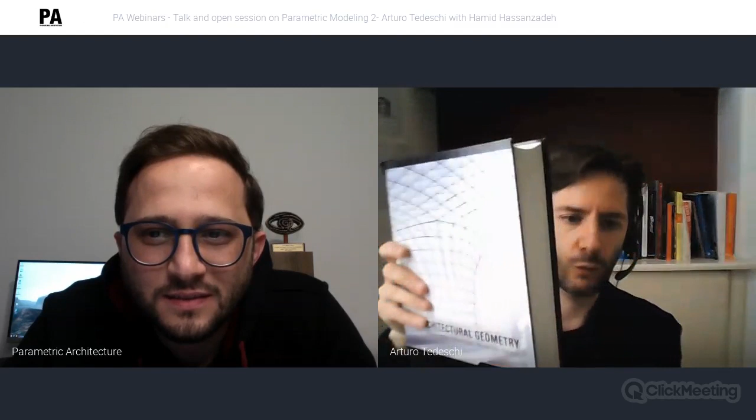This one to me is one of the Bibles, I hope you can see it. It's called Architectural Geometry, by Helmut Pottmann, who is a master, by Bentley Systems. This book was published, I think, around 2006-07, if I remember correctly. It's a great one.

I really love it, and it's more than an overview of architectural geometry. It covers all the topics behind shape, the control of architecture and design complexity. Everything is about shape, everything is about geometry, from NURBS to meshes to surface continuity, all the technical vocabulary well explained in this book, which can be read on two different levels. You can really go deep into the contents, or you can just enjoy the book, not just looking at pictures, but also enjoying it in a more superficial way. To me it's a must-have for computational designers.

There's another one here, called The New Mathematics of Architecture, published by Thames and Hudson. This one is also interesting because there are many examples of architectures combined with mathematical aspects and the DNA behind them.

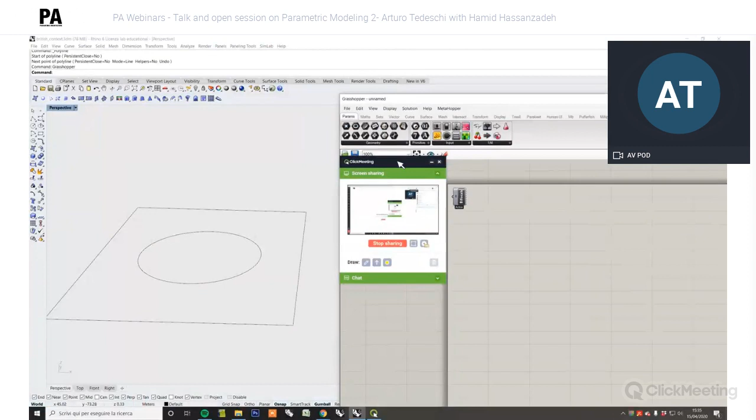Okay, now you should hear my voice again, and you should also see my screen.

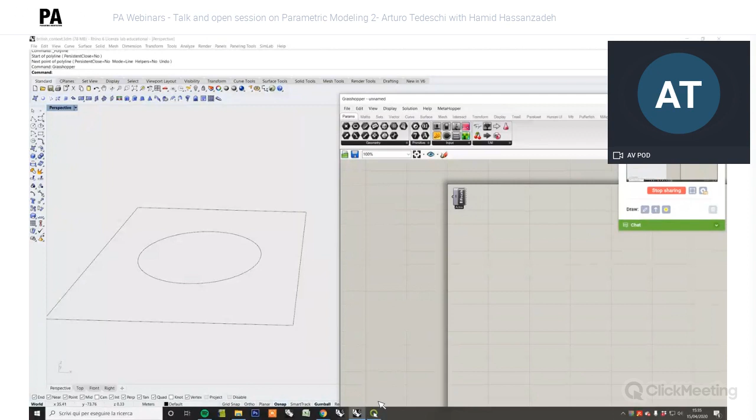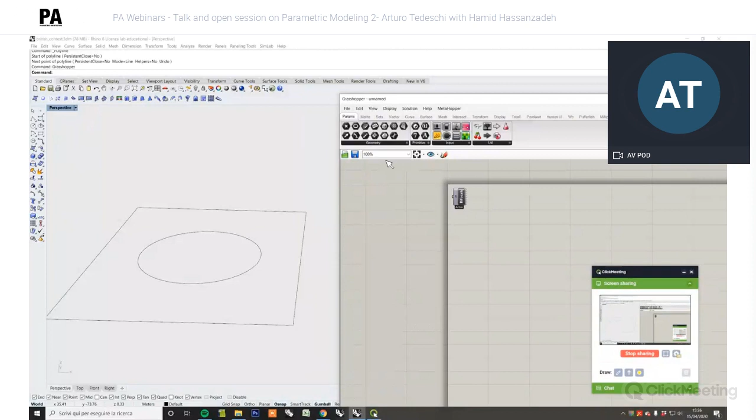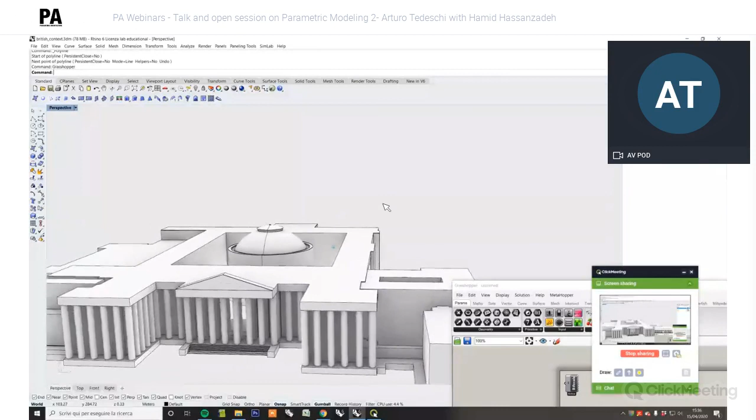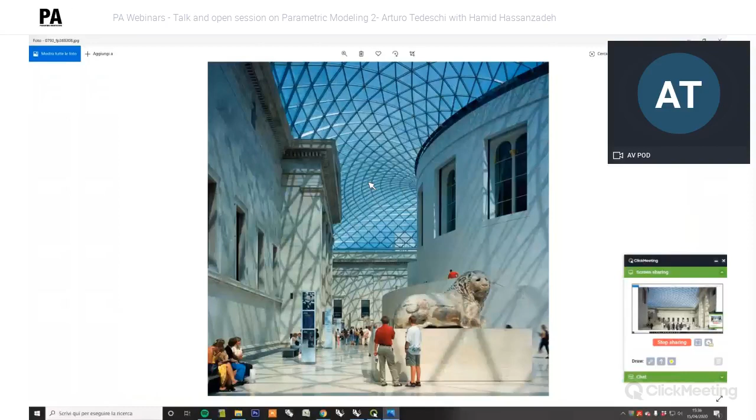Okay, basically we are going to start with a 3D model that I already prepared. Don't worry, you don't have to model the whole building, as you can see here—this is just a way of giving you context. This is the British Museum in London, and we are going to go through the process to create the final geometry. We're going to create the roof like this, which is a kind of steel diagrid based on a square grid with a cylinder inside, as you can see here.

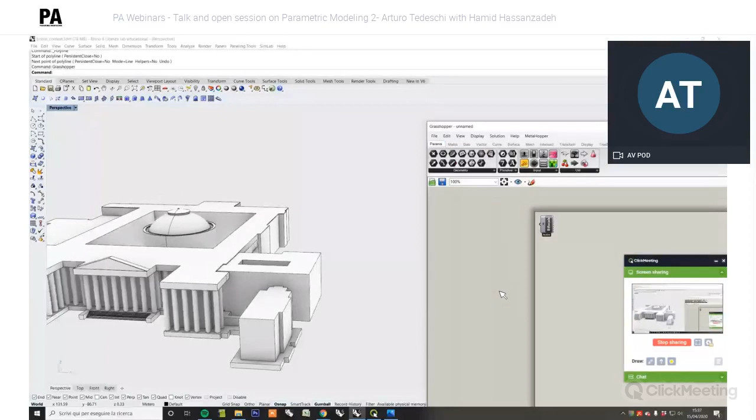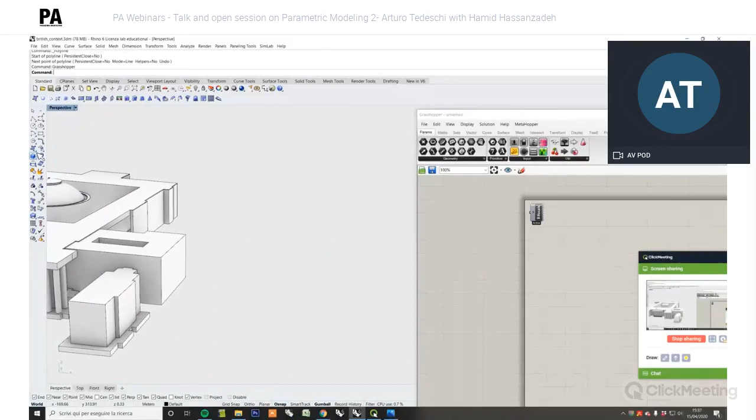Okay, so in general, when you want to create a three-dimensional grid in Grasshopper, it's usually a very easy procedure when you're dealing with simple, flat surfaces. So, for example, if I'm creating a flat surface here.

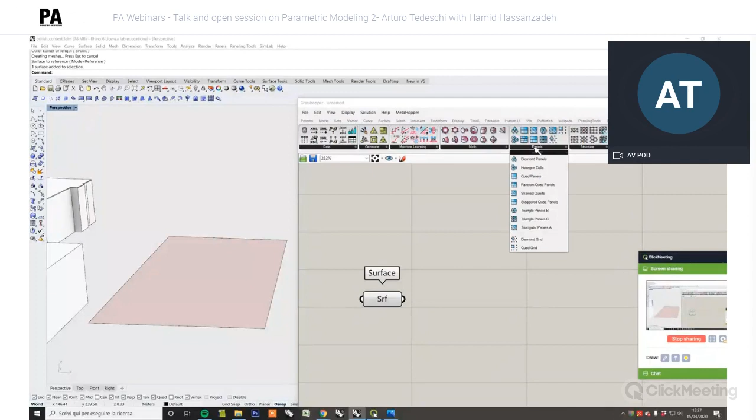We can import the geometry, and then, for example, using the Lunchbox set of tools in the panels category, we have many tools, for example diamond panels, allowing us to create complex grids on top of our surface just by playing with the U and V parameters, as you can see here.

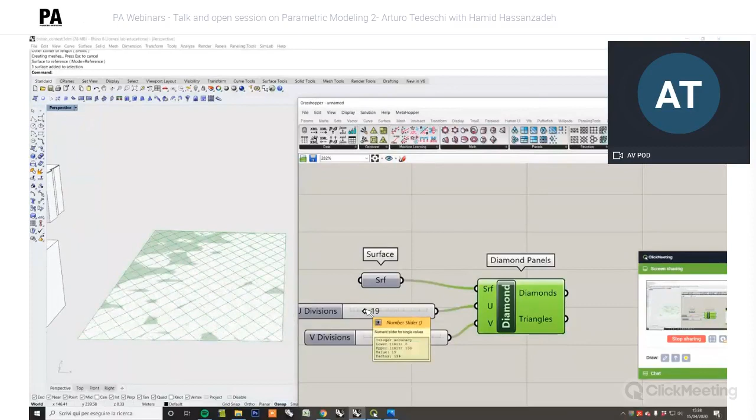So you can play with this, and it's super easy. It's more complex, of course, when you have something like this. If we don't have a flat surface, but we have a geometry with a hole inside, it's not easy to create a diagrid on top of it.

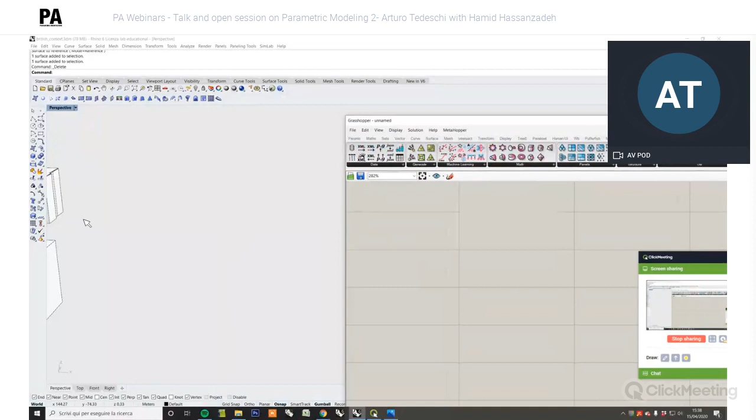If I repeat the same procedure on a flat surface with a hole inside for the diagrid, I'm going to show you, for example, if we have something like that and I create a hole inside, and then I'm going to trim this one like this.

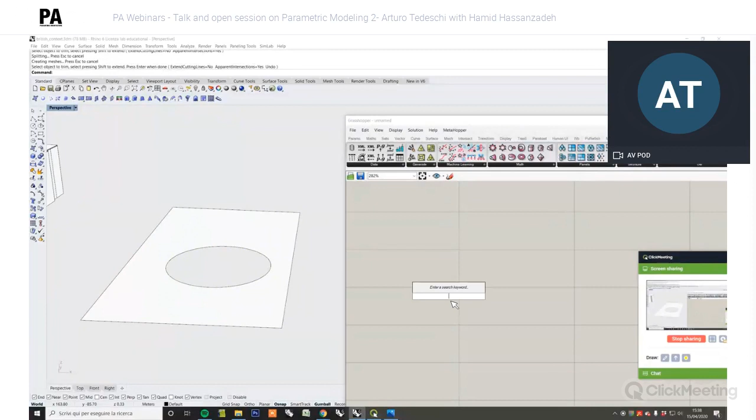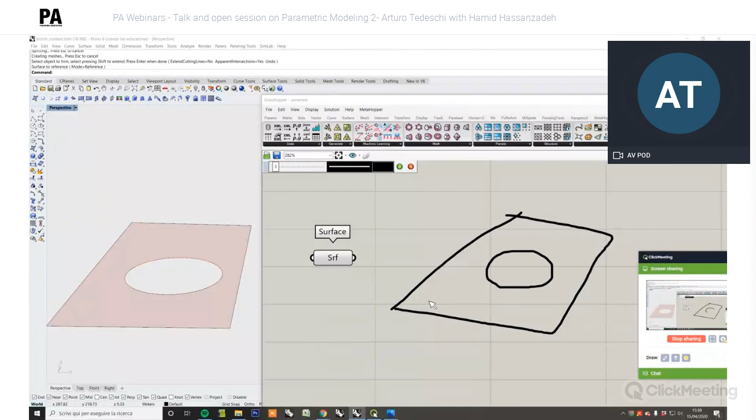As you probably already know, we have a surface called a trim one. A trim geometry is a surface that in general doesn't embed the mathematical domain. In other words, if we have something like that with a hole like this, the mathematical grid is also, let's say, inside our hole. So if you use diamond like this...

Okay, so as you can see, our grid is also inside our hole.

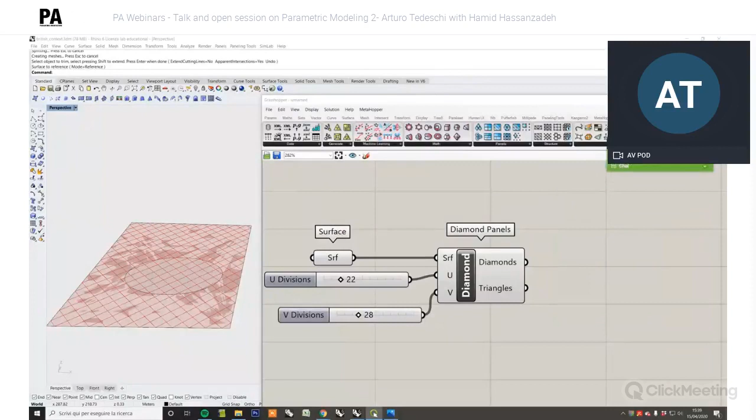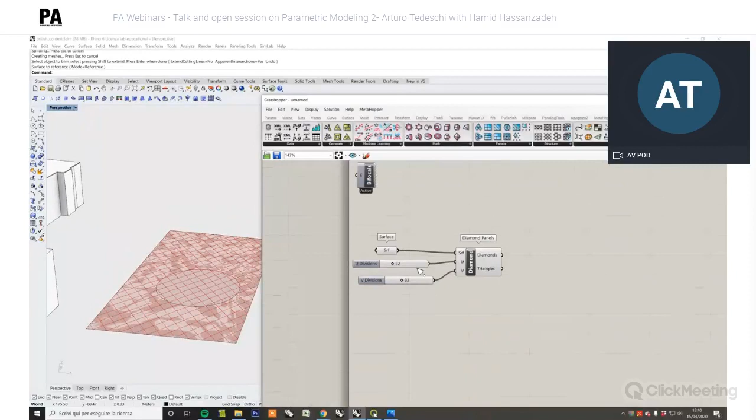So in order to create a complex grid when you are dealing with trimmed surfaces, it's different, and we have to rely on different strategies. For example, let's do something more complex directly on our building.

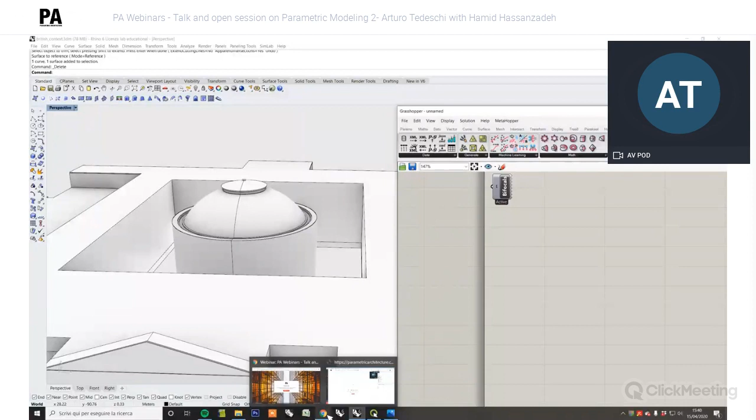So the aim here is starting from two main curves. We have a rectangular one here and a cylinder here. We are going to replicate the process that computational designers use in order to create the three-dimensional grid on top of the curve here.

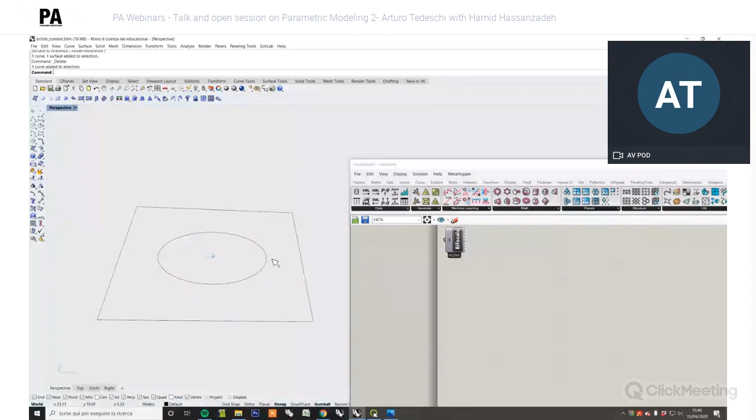So I can turn off the building for a second. As you can see, we just have one rectangle here and one circle. More or less, the dimensions are coming from the actual dimensions.

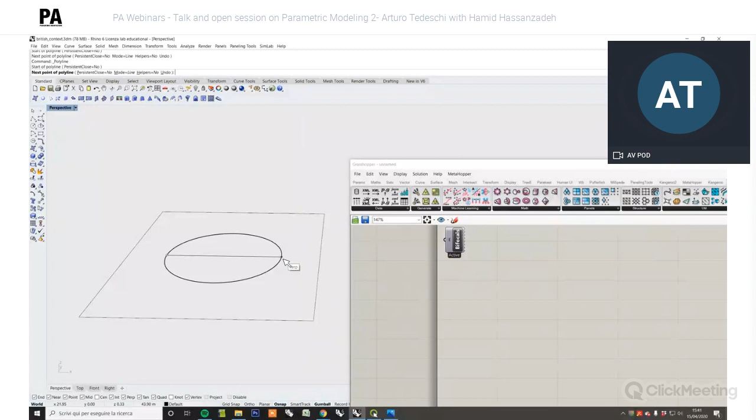More or less, we have 73 meters and 92 meters for the second distance, and here we have a radius which is about 44 meters. It's not important to have exactly the same dimensions, but more or less I'm playing with this kind of values. And my Rhino is set on meters.

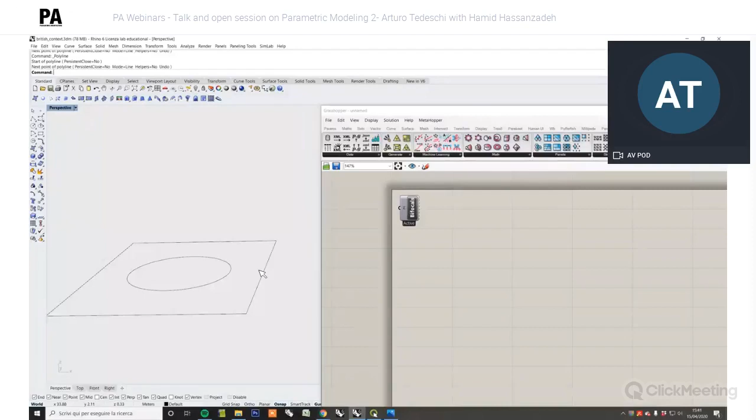So no tricks. We can create the whole structure, of course, in a simplified way, but more or less we are going to create the actual structure starting just from two simple curves.

So let's go import our geometries in Grasshopper. We can use the curve component. We are going to set the first circle here.

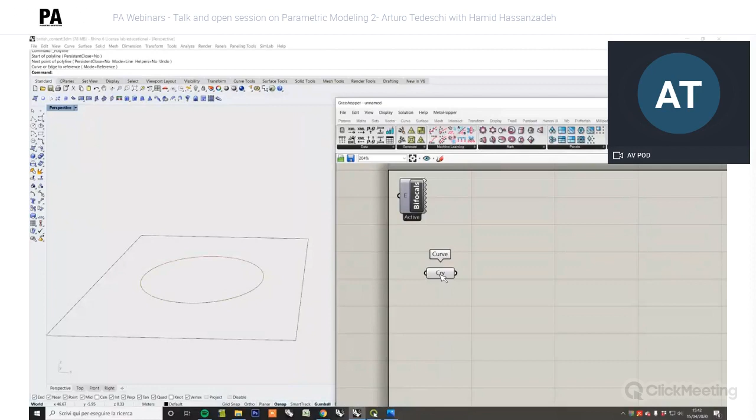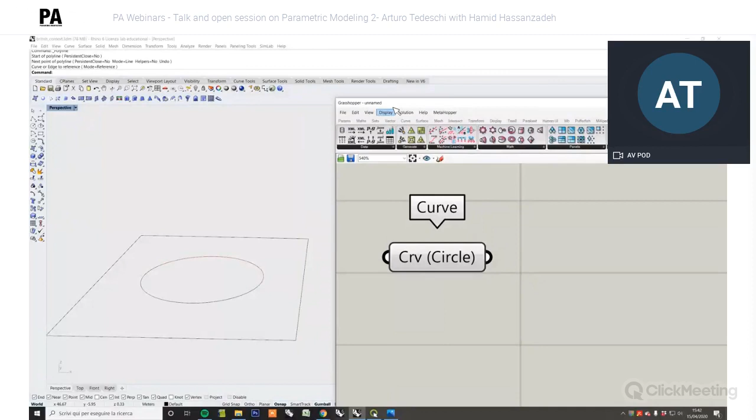It's always important to rename components in order to have a more organized script. So I can write, for example, circle here. So we know that this one is a curve, but it's also the circle.

And we can do the same thing for our rectangle. So Control C and Control V, and I can write rectangle here. So set one curve - sorry for the misspelling here. Okay, so we have the circle and the rectangle here.

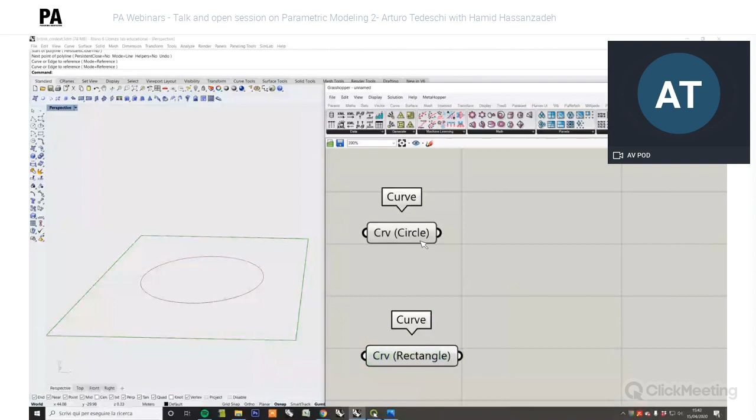It's always important when you import curves from Rhino to Grasshopper to reparameterize the curves themselves. So just right-click here, reparameterize, right-click here, and reparameterize.

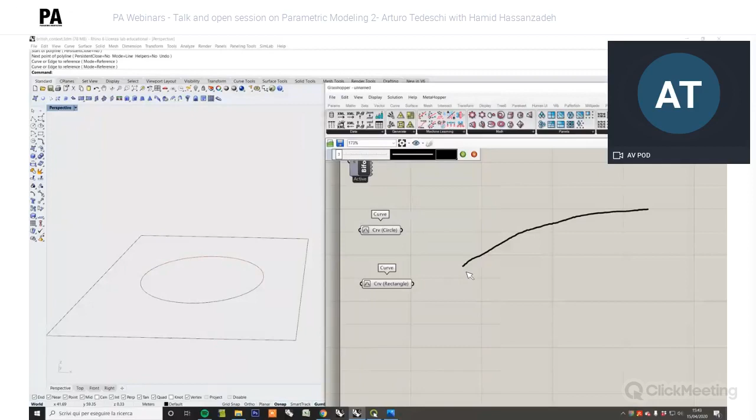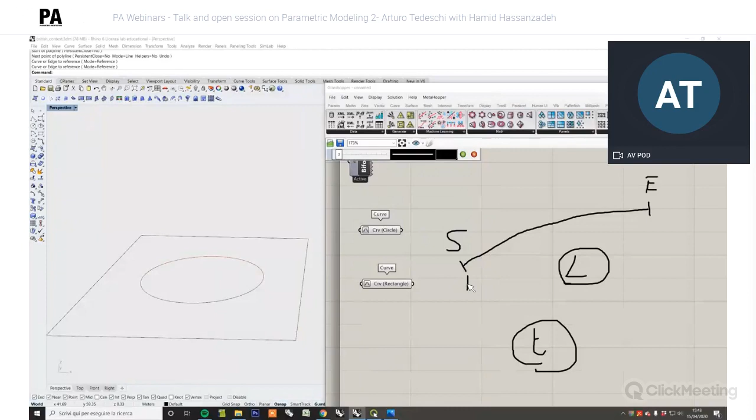Reparameterizing a curve means that if you have a curve with a length equal to L, if your curve is not parameterized... if your curve is parameterized, it means that you can select the points on your curve using just one single parameter, which is called t. So if t is equal to 0, you have the start point. If t is equal to 1, you have the end point.

When you set reparameterize here, you are normalizing the curve into an interval between 0 and 1. So for example, if you want to select this point here, or this point here, or this point here, there will be values between 0 and 1 in terms of t coordinates. But we are going to do something about that in a while.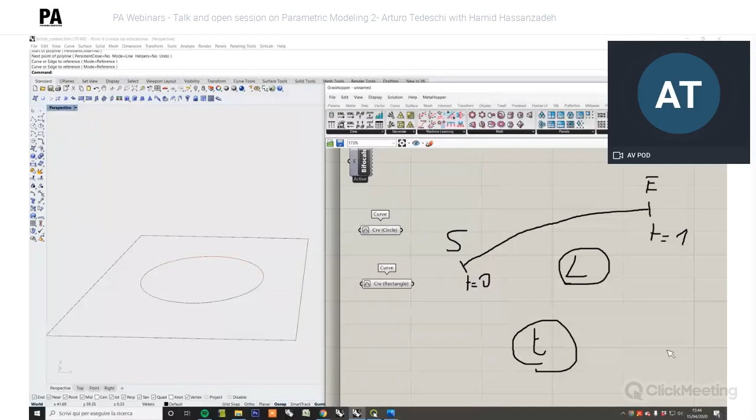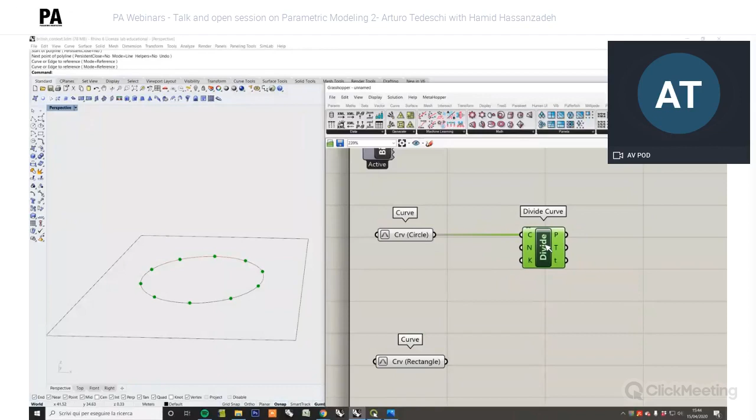The second thing to do is divide our circle into 8 parts, for example. So I can use a component called divide curve. This one goes here, and of course I'm going to set my value here.

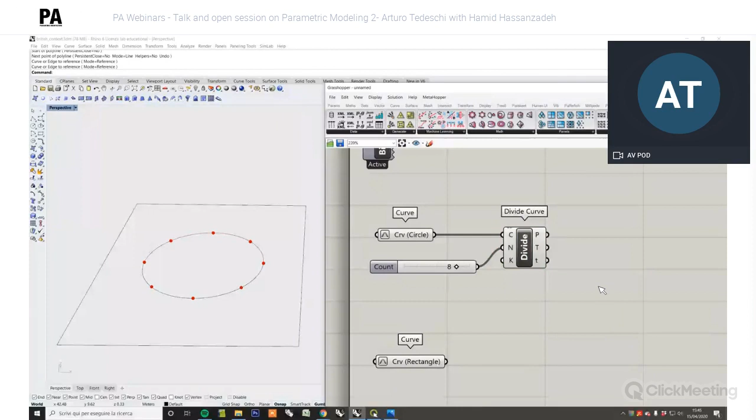So I'm dividing into 8 parts, and it is divided symmetrically, as you can see here. As a second thing, I want to split my circle using the points coming from the divide curve component. In Grasshopper, we don't have a command called split, but actually the command is called shatter. So shatter needs the curve to be split, so this one goes here.

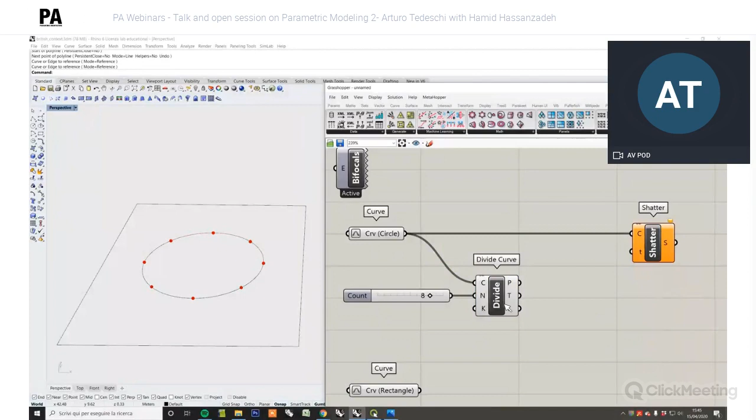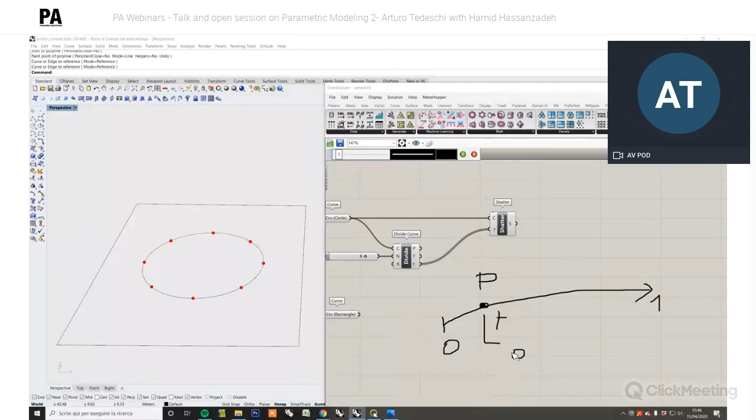And in order to actually split our curve, we need the t parameter I was talking about before. So the t parameter is connected here. In other words, if you have a curve like this and you want to split it at this point here, you need to provide the t parameter, which is, once again, between 0 and 1. So more or less this one will be something like 0.2, for example. Actually 0.5 is not exactly the midpoint, but this is a vast topic.

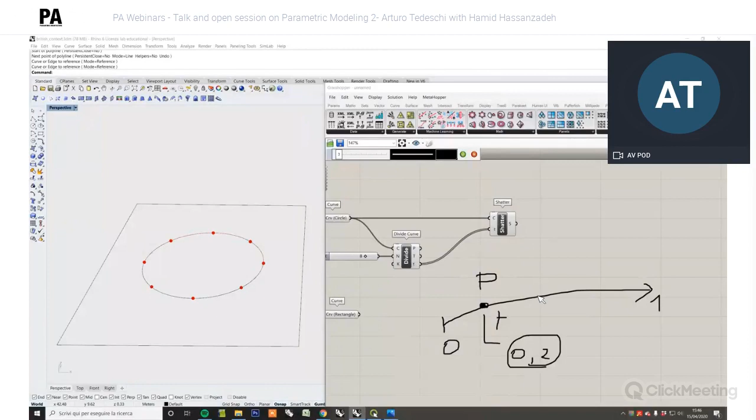We cannot cover everything about curve parametrization, but basically, if you want to cut a curve using a point, you need to get the t parameter of the point itself, which in this case is generated by the t output. If you connect a panel here, as you can see, we have the t parameters of our points between 0 and 1. So we will have 0, 0.13, 0.25, and so on.

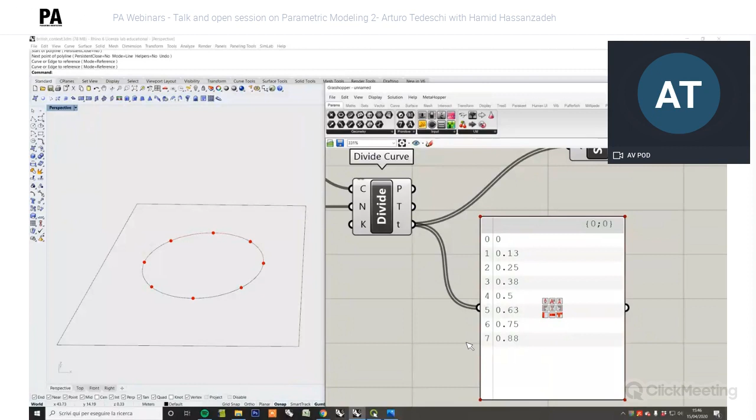Okay, so basically now we have our circle. From shatter, from the S output, we are getting the individual segments of the original circle.

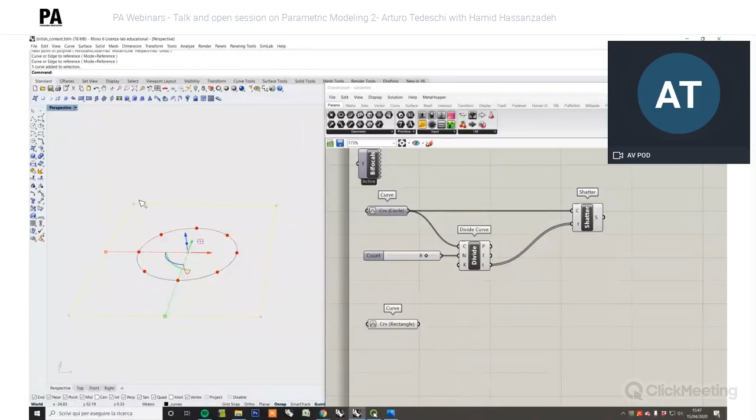As a second step, we are going to do something similar for our rectangle here. Instead of dividing, since the rectangle is basically a closed polyline, the first thing to do is exploding the polyline. So like this, we are getting as an output the first, the second, third, and fourth segment.

And also the vertices from the explosion itself. If you check this output, as you can see, we have 5 points because we have an overlapping of this geometry. Another way for selecting, if you want to get 1, 2, 3, and 4 points, for example, you can use a tool called discontinuity.

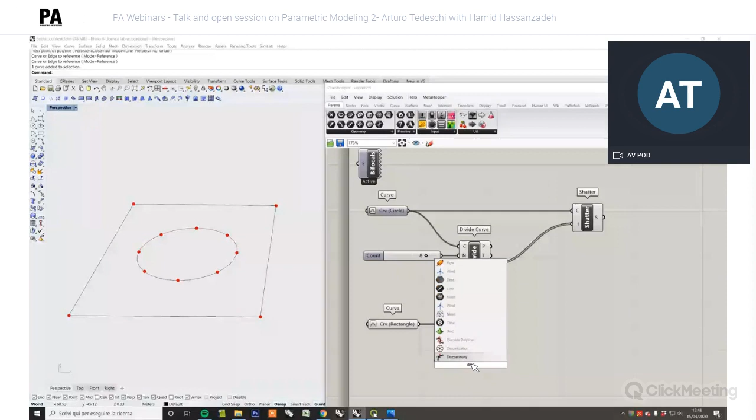So I connect this one here, and now we are getting only 1, 2, 3, and 4 without any overlapping, because when you use explode, you are actually exploding the curve, so the start point and end point overlap. That's why we had 5 points before.

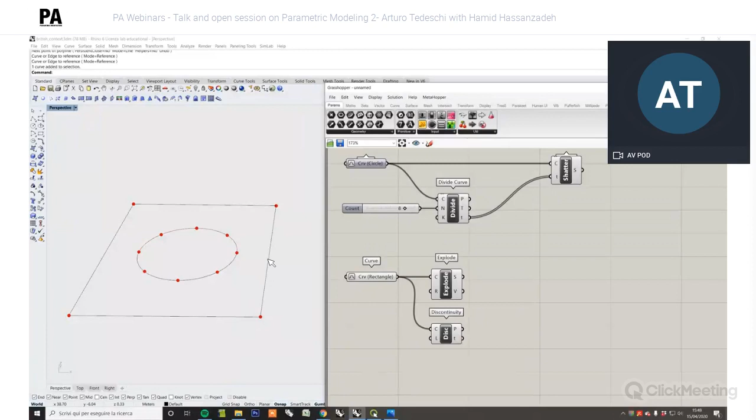Second thing to do, I want to get 8 points as I did for the circle. Here we just have 1, 2, 3, 4, and my idea is selecting the midpoint of this segment, midpoint, midpoint, and midpoint. In order to do that, there is a component called point on curve. We can connect it, this one here, and as you can see, we have now 1, 2, 3, 4, 5, 6, 7, 8.

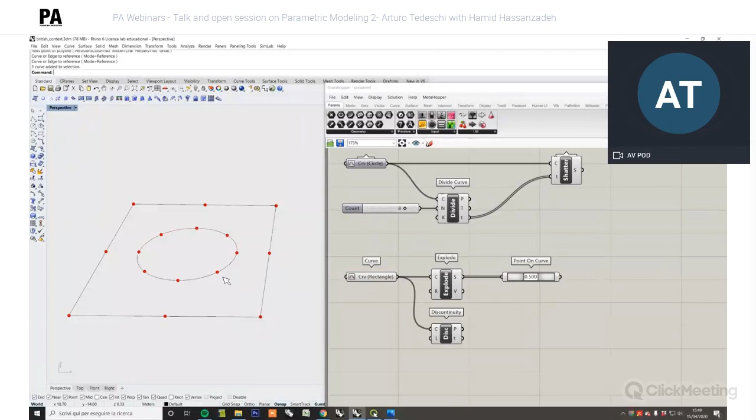So 8 points on our circle and 8 points on the original rectangle. With the same logic, I can use shatter also here. Make sure that your component is reparameterized here. So I want to shatter this one.

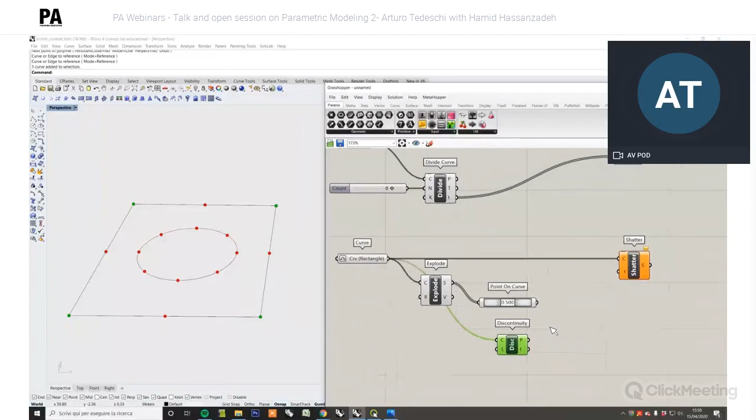And I want to split my rectangle using the 8 points coming from this guy here, but also this guy here. So the first thing to do is merging them together. From this one I'm getting 4 points and 4 points from this one, so a merge component. Okay, so inside this merge component, now we have 8 points.

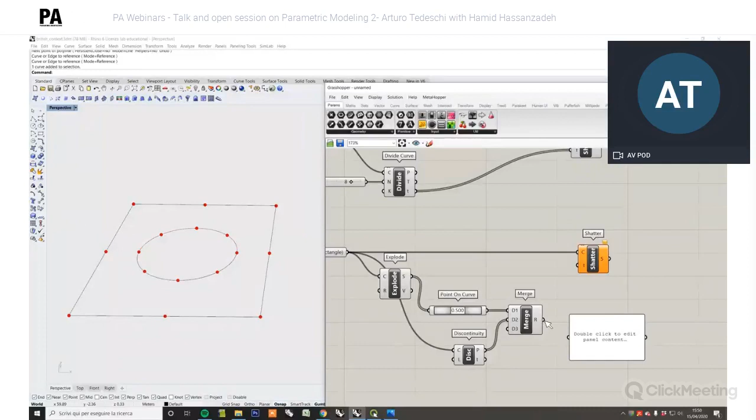But as I mentioned before, we cannot use those points to shatter, to split my curve, because they are expressed in x, y, and z coordinates. We need to find the t parameter of each point according to the original curve.

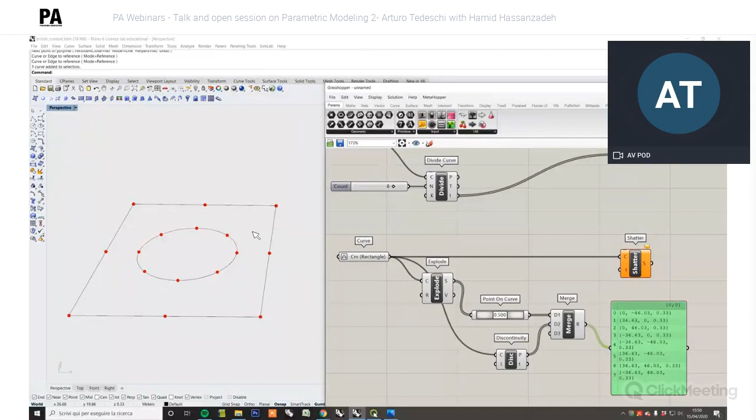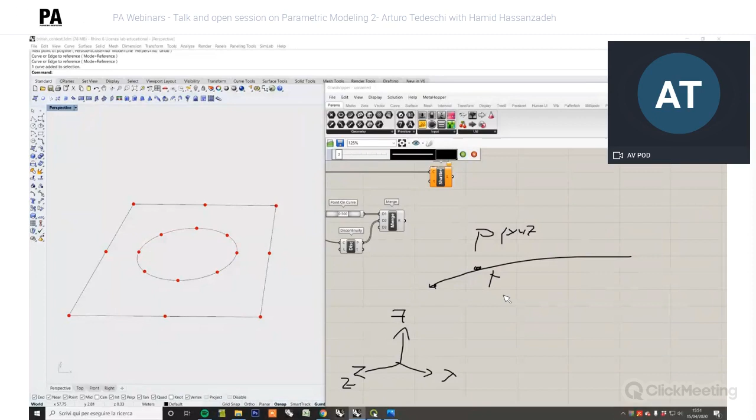So when you have to do this kind of conversion, let me sketch something. If you have this point, it is expressed in x, y, and z coordinates, of course. So we have x, y, and z. But we also have a t parameter, which ranges between 0 and 1.